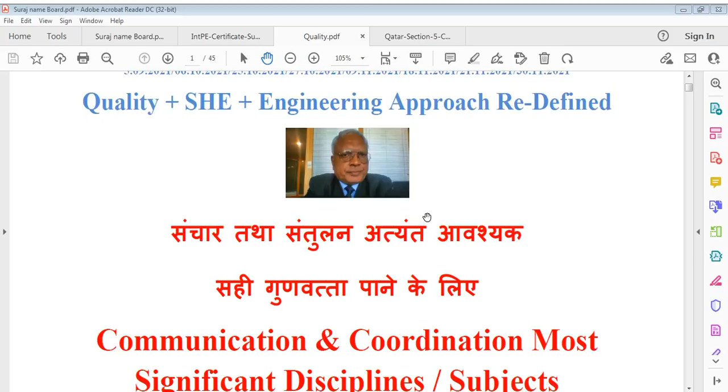Now I was talking about quality, about communication, and about something very important in life. Of course, talking about communication and coordination, I try to explain that. That's very important in our world of engineering, without which we cannot do anything. Without communication and coordination, we stand nowhere, and that's our requirement.

Communication and coordination must stand everywhere in engineering, these are required everywhere, even in design or pre-design, in construction, in sites, or in dealing with contracts. So every detail is required.

That detailing is very much important. If we don't have that detailing capacity, we cannot do engineering. Not only engineering, every work where quantity is required, where quality is required, where coefficients are required, where formulas are required, wherever something is required, communication and coordination are very important.

When you do design work, we have to think of everything. We cannot simply say we have done it. Simply thinking and doing is not enough. We have to think many times. We have to think also what's our objective, what do we want to achieve.

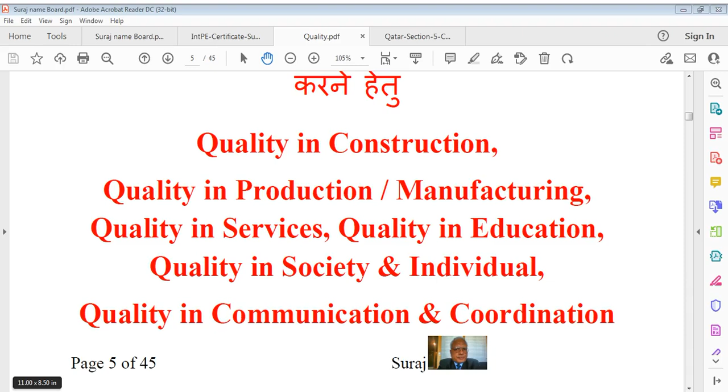A person having the highest level of qualification has capacity to chat properly, because that requires highest functioning of mind, highest functioning of your power. If my mind does not function properly, I cannot chat. So I say quality in construction, quality in production, in manufacturing, in services, in education, in society, in individual, and quality in communication and coordination. We have to get these facts in the real world.

If you don't have these capacities, first of all, quality in society and individual. Many times I have spoken about this, but every time I come back to it, because something else comes into mind. There was a time when people did not understand all this, but people were sincere, professionals were sincere, students were sincere. Everybody had some fixed targets. But now target identity has changed. Only one target among 98% of people remains, and that is how to make money, more and more.

You mean to say that you must have the material world. Even through sciences, through engineering, or through other professions, we are interested in how to make more money. That is our objective, which is really rubbish. It's not scientific, it's not natural, because we have changed our objective, we have changed our track. And when we just live for money, the communication and coordination world disappears. For that purpose we can go to whatever extent, good or bad. So when I'm saying communication and coordination, I have to talk about the professional world, and that is here.

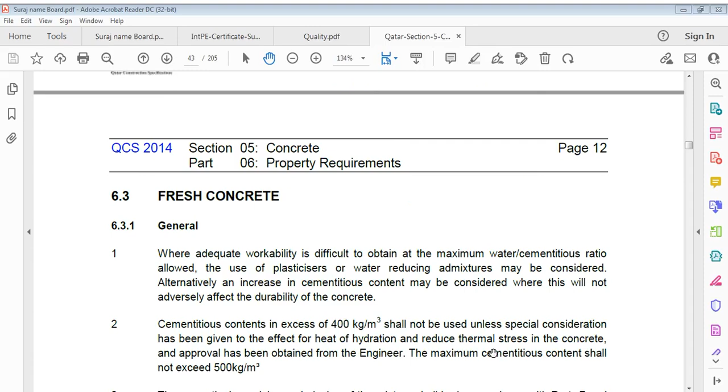Concrete, then we talked of grades of concrete, and durability requirement. So we were here, I have gone through slump etc. You remember? I was talking about temperature of concrete. Let's go back and discuss. It's page 43 of this 205 page file. We talked of temperature. It is 5 and 32 degrees Celsius.

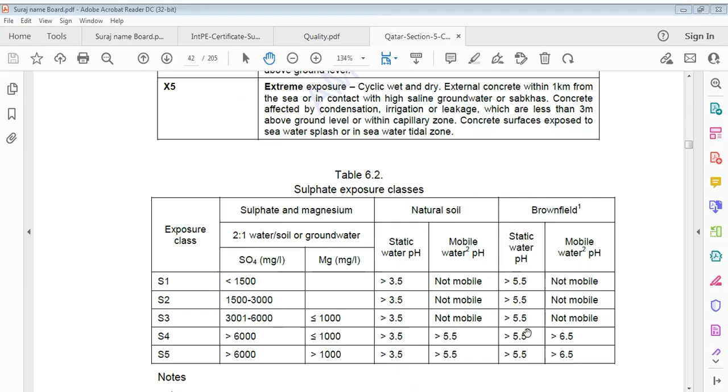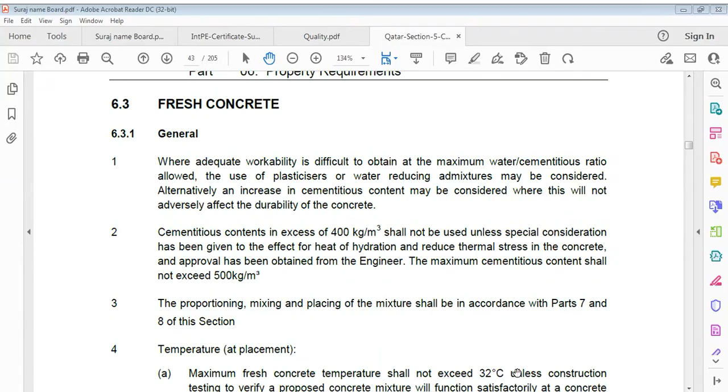We studied that one, and then we went to the various sulfate exposure classes, and exposure classes of reinforcement corrosion, and before that corrosion etc. we talked of. Now we have fresh concrete. What does it say? What is fresh concrete? What does it mean? How does it work? Temperature controls, we have to go through that.

Otherwise we have known everything. So just for a little overlap of previous work: where adequate workability is difficult to obtain at the maximum water/cementitious ratio allowed, use of plasticizers or water reducing admixtures may be considered. Alternatively, an increase in cementitious content may be considered where it shall not adversely affect durability of concrete.

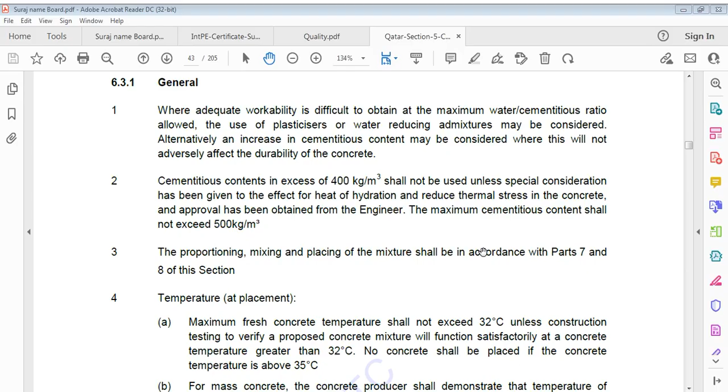Maximum fresh concrete temperature shall not exceed 32 degrees Celsius unless construction testing verifies a proposed concrete mixture shall function satisfactorily at a concrete temperature greater than 32 degrees Celsius. No concrete shall be placed if concrete temperature is above 35 degrees Celsius. So the tolerance limit is from 32 to 35 degrees Celsius. No way should you concrete when its temperature is more than 35, but the normal limit is 32 degrees Celsius. The lower limit is not given here, but that is 4 degrees to 32 degrees.

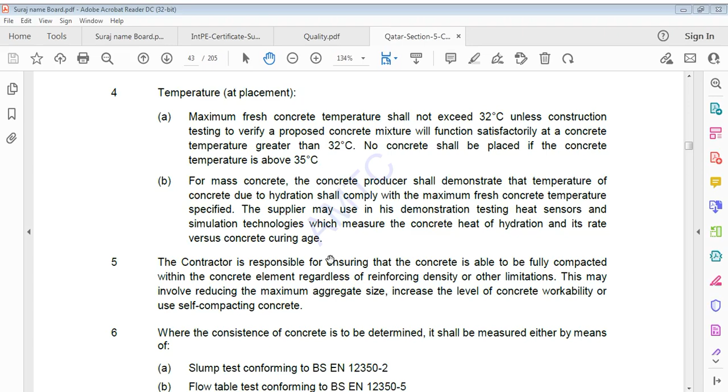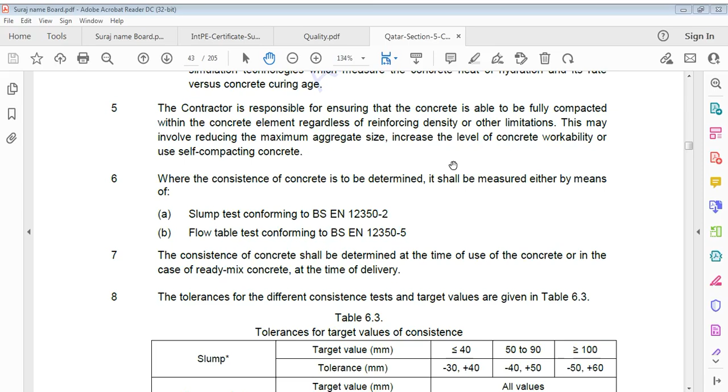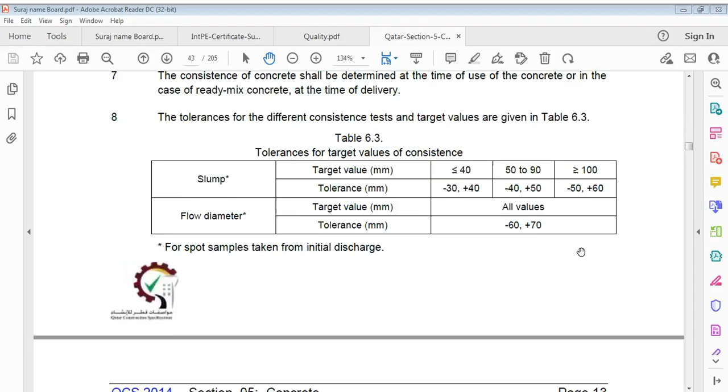Where consistency of concrete is to be determined, it shall be measured either by means of the slump test or flow table test. Consistency shall be determined at time of use of concrete, in case of ready-mix concrete at time of delivery. Tolerances for different consistencies are as follows. Slump is given here, you can see, and of course flow diameter is given. Certain temperature requirements of concrete.

Now we have to find various grades of concrete. You know them, but because we are reviewing this document, we have to refer. Grade means strength of concrete, that is compressive strength of concrete, where strength is classified with respect to compressive strength. This table is used in certain proportions. We have to make it a reference only, currently a temporary reference. Characteristic compressive strength.

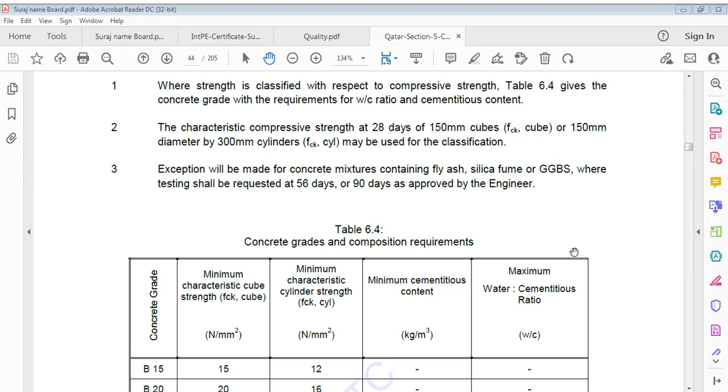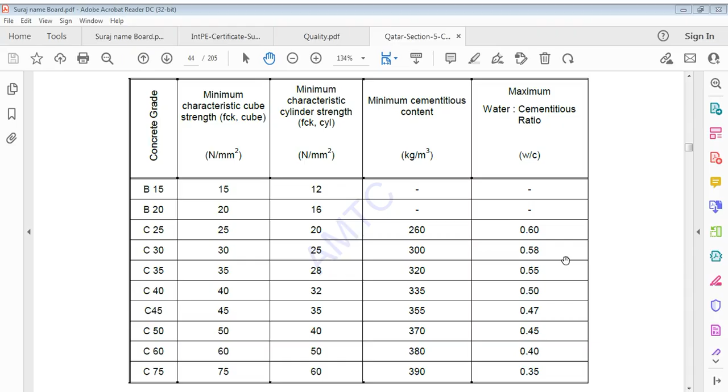Characteristic compressive strength at 28 days of 150 cubes, represented FCK cube, or 150 diameter by 300 cylinders, that is FCK cylinder, may be used for classification. Exception shall be made for concrete mixtures containing fly ash, silica fume, or GGBS, where testing may be requested at 56 days or 90 days as approved. Now, what are these grades? The table columns are concrete grade, B15 to C75, minimum characteristic strength, minimum characteristic cylinder strength, minimum cementitious content, and maximum water cement ratios.

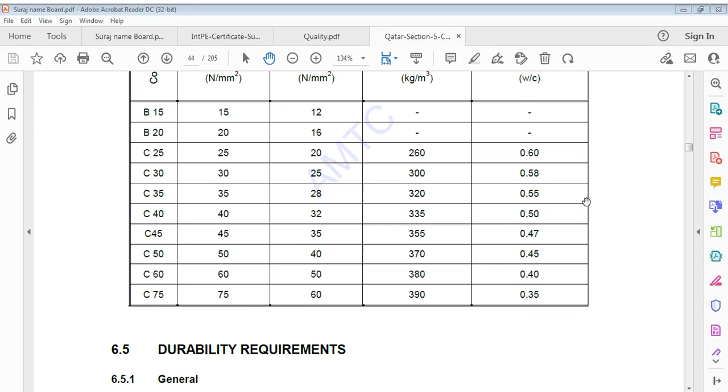These are given here. Cement content never increases beyond 390 here; 400 is the maximum limit. As concrete grade goes higher, from B15 to C75, water cement ratio goes on decreasing, and content of cement increases. For example, in C25 it is 260 kilograms per cubic meter. In C75 it is 390 only, not much different. But water goes on falling, from 0.6 to 0.35, and this is where variation lies. You can review this table yourself, because this is very nominal engineering.

Durability requirement. Durability is very important. It should continue for a long time with the same resistance it starts with. When you produce concrete, whatever resistance you get in 28 days, or 90 days, or 60 days, it should continue with further improvement, but let us say the same, for however many years it has to serve. I say live because this is a living being for me. It is functional, not a dead item. We say its weight is dead, but its function is not dead.

Live actions apply, wind applies, or you can say seismic action applies. Dead load is already there, but it's not the only load; there are so many other loads on that work forever. You can see round the clock, we cannot stop that.

Durability: as we say, constituent materials shall not contain harmful ingredients. First question, and first answer, is what is durability? Its requirement is that constituent materials shall not contain harmful ingredients in such quantities as may be detrimental to concrete durability or cause corrosion of reinforcement.

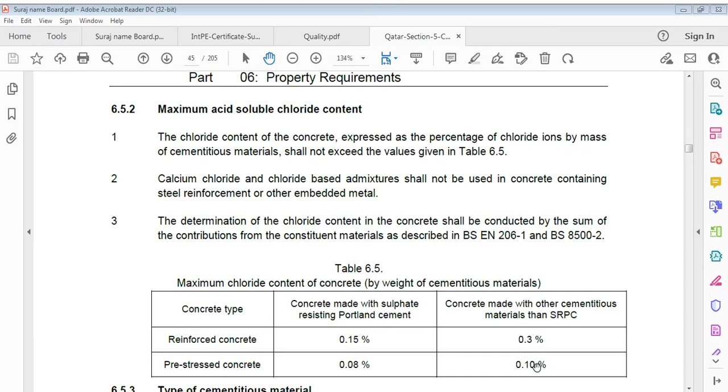And we have seen maximum acid soluble chloride contents, and we have talked about this already. It is calcium chloride, if we can say. Chloride content of concrete, expressed as percentage of chloride ions by mass of cementitious material, shall not exceed the value given in this table.

Calcium chloride and chloride based admixtures, you can say, shall not be used in concrete containing steel reinforcement or other embedded metal.

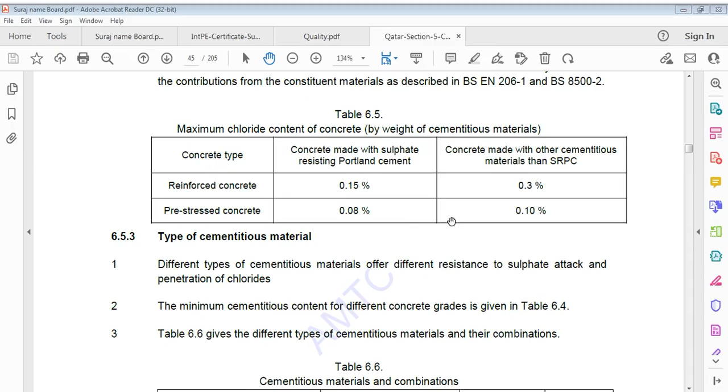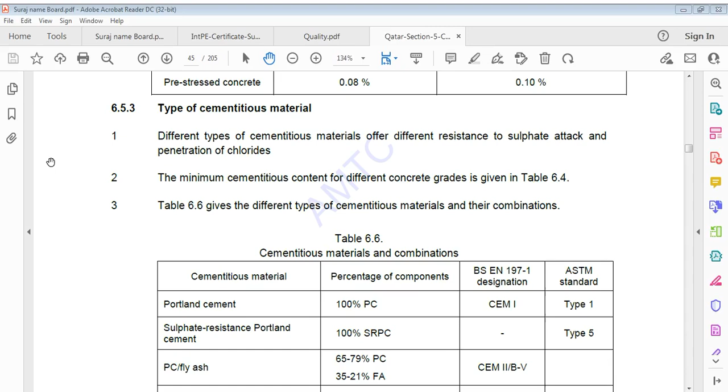Type of cementitious materials: different types of cementitious materials offer different resistances to sulfate attack and penetration of chlorides. Minimum cementitious content for different concrete grades is given in the table. Then we can see this table. Portland cement is already given; we have gone through Portland cement type 1 itself. SRPC is type 5. Here, supplementary cementing material is of no use. Ordinary Portland cement, percentage components 100% PC.

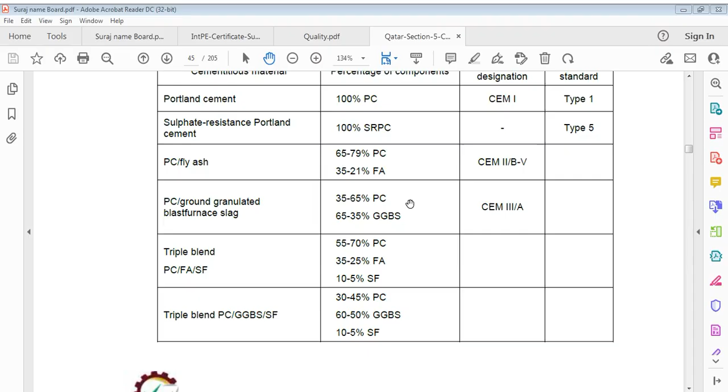Likewise, we have to see about fly ash and PC, combinations of various grades here. We have gone through that before: if it is 65 to 79% Portland cement, then fly ash can be 35 to 21. With PC and GGBS, PC is 35 to 65 and GGBS is 65 to 35. This is the combination, and you also can have a triple blend.

We have PC, fly ash and SF, silica fume or micro silica, and for these three, PC is 55 to 70, fly ash is 35 to 25, silica fume is 10 to 5. This is another triple blend: PC, GGBS, no fly ash in that case. PC is 35 to 45, GGBS 60 to 50, and SF is 5. In fact, generally up to 30% Portland cement and 70% GGBS are used.

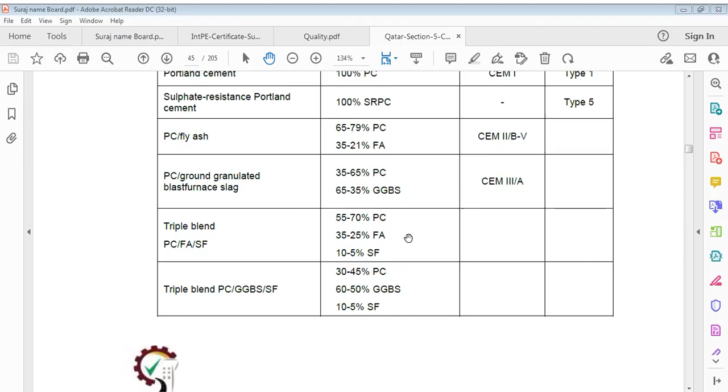Resistance to alkali silica reaction. Alkali silica reaction is the most common form of alkali aggregate reaction. Here's the point: dry concrete is not prone to cracking by alkali silica reaction, as it requires an external source of water to develop sufficiently to cause cracking.

Where aggregate contains a variety of silica susceptible to attack by alkalis from cement and other sources, and concrete is exposed to humid conditions, actions shall be taken to prevent deleterious alkali silica reaction using recommendations and procedures given in BS. These BS are here.

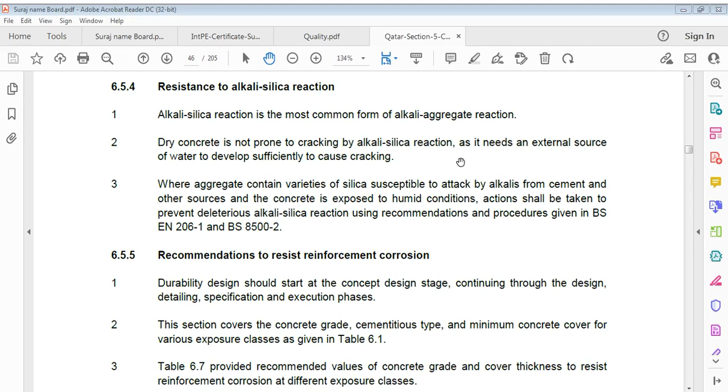Again I say, where aggregate contains a variety of silica susceptible to attack by alkalis from cement and other sources, and concrete is exposed to humid conditions, action shall be taken to prevent deleterious alkali silica reaction. It's called alkali silica reaction because aggregate contains silica that can be attacked by alkalis.

Now we have to resist corrosion and consider durability of concrete. Durability design should start at the concept design stage, continuing through design, detailing, specification and execution phases. This section covers concrete grade, cementitious type and minimum concrete cover for various exposures.

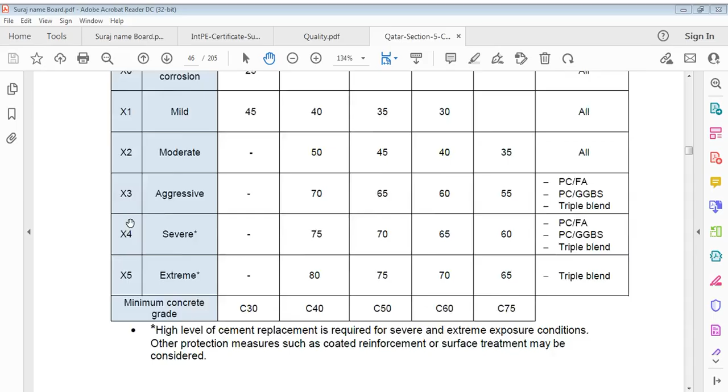Certain covers are given for all exposure classes here, X1, X2, X3. There are 6 exposure classes: no risk of corrosion, mild, moderate, aggressive, severe and extreme. This we have to clearly understand. From mild or moderate to the extreme stage, you see the cover thickness for different concrete grades. Higher grade means lesser cover, lower grade means higher cover.

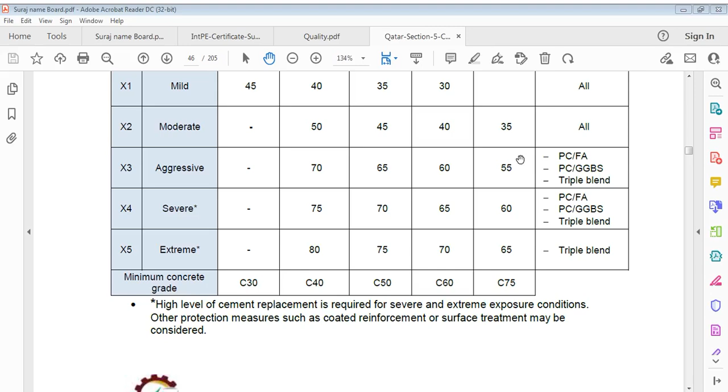And what combination of cement is given here, you can see. We have already discussed this. A high level of cement replacement is required for severe and extreme exposure conditions. Other protection measures such as epoxy coated reinforcement or surface treatment may be considered.

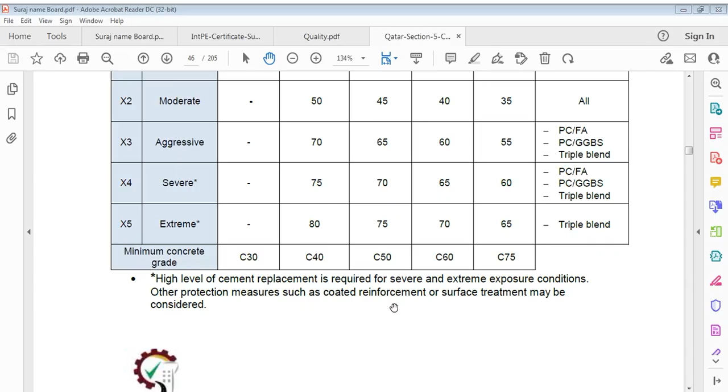So this gives some idea of what thickness of cover can be taken for good durability, and what percentage of OPC can be replaced by GGBS. Sometimes we have used up to 70% replacement of OPC to resist sulfate attack. How to resist sulfate attack?

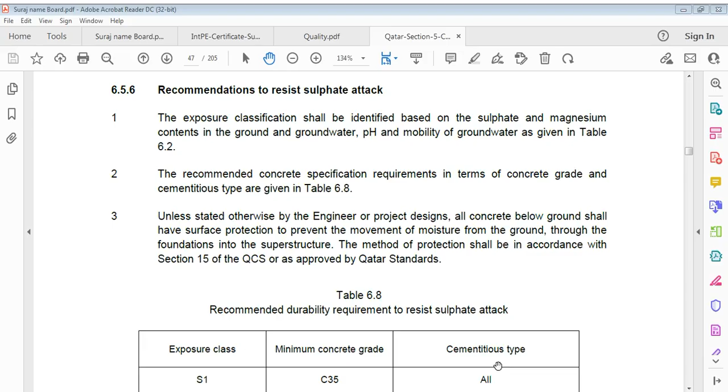Exposure classes shall be identified based on sulfate and magnesium content in the ground and groundwater, that means soil and groundwater, along with the pH and mobility of groundwater. Recommended concrete specification requirements in terms of concrete grade and cement are given.

Unless stated otherwise by the engineer or project designs, all concrete below ground shall have surface protection to prevent movement of moisture from the ground through foundations into the superstructure. The method of protection shall be in accordance with other standards. Now, what is the recommended durability requirement to resist sulfate attack?

There are 5 sulfate classes, S1 to S5. S5 requires special treatment when sulfate content exceeds 6000 mg per liter and magnesium content exceeds 1000 mg per liter.

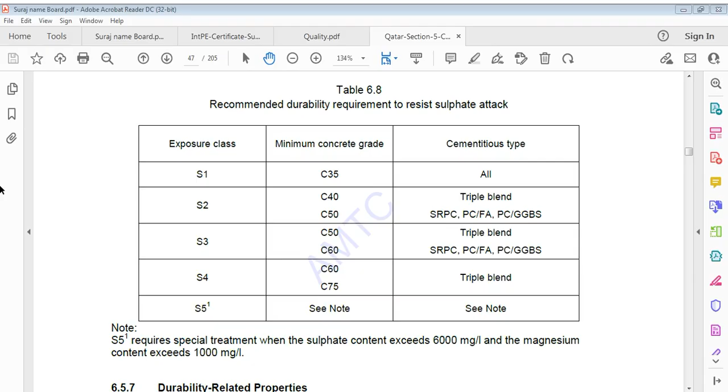Durability related properties. Durability of concrete is greatly influenced by the ability of the concrete cover to resist movement of liquids and gases through concrete. Commonly used tests for assessing transport properties of concrete are given in this table. No values are currently specified for various exposure classes, but they may be requested by engineers.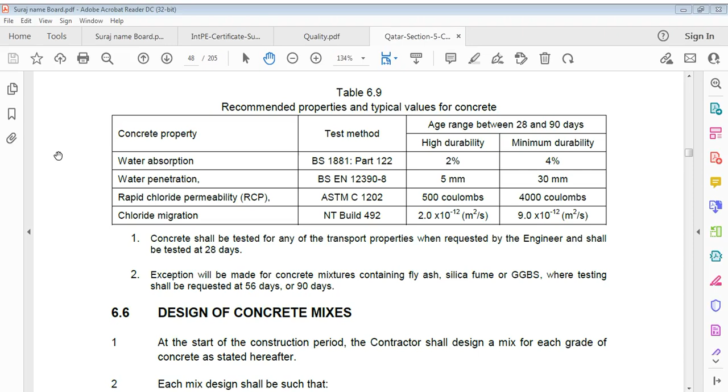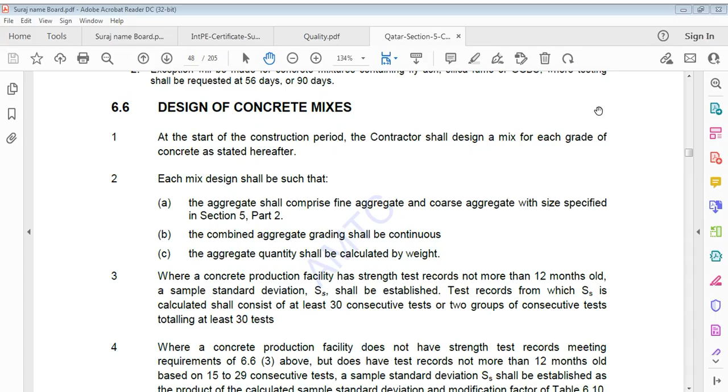Design of concrete mixes. Whenever you start some construction, the contractor should design a mix for each grade of concrete. Each mix design shall be such that the aggregate shall comprise fine and coarse aggregate with the size specified. Combined aggregate grading shall be continuous. Aggregate quantity shall be calculated by weight, not by volume.

So there are three conditions. Aggregate comprises fine and coarse aggregates. Combined aggregate grading shall be continuous. Aggregate quantity shall be calculated by weight.

Where a concrete production facility has strength test records not more than 12 months old, a sample standard deviation can be worked out. The test records from which it is calculated consist of 30 consecutive tests or groups of consecutive tests totaling at least 30.

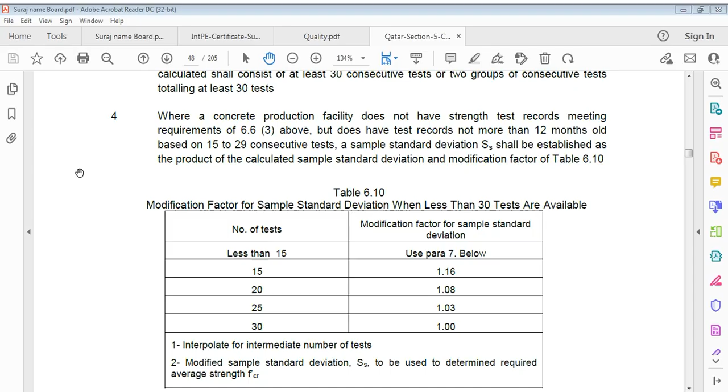Where a concrete production facility does not have enough strength tests, we can use some factors given in this table. If there are less than 15 tests, then use para 7 below; we'll see what that is. Then for 15, 20, 25, 30 tests we can use these coefficients, the modification factor for sample standard deviation. Interpolate for intermediate numbers of tests; the modified sample standard deviation is used to determine the required average strength.

To determine the correction factor between cube strength and cylinder strength, the contractor establishes at least 30 consecutive strength tests from each proposed mix. This correction remains valid through the project, provided no change in material properties and no change in source occurs. The required average compressive strength, the target mean strength used as the basis for selection of concrete proportions, shall be determined here.

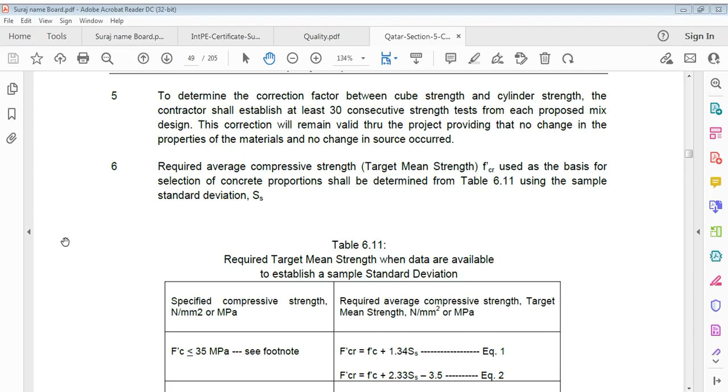Now, required target mean strength when data are available to establish a sample standard deviation. Column 1 is specified compressive strength in Newton per millimeter square or MPa, and column 2 is required average compressive strength, target mean strength, in MPa. When the specified fc is less than or equal to 35 MPa, use the larger value computed from the equations.

fcr, the required average compressive strength or target mean strength, is fc plus 1.34 Ss, 1.34 standard deviation. That's equation 1. The other one is fc plus 2.33 Ss minus 3.5. That is equation 2 in this case.

When fc is greater than 35 MPa, fcr is equal to fc plus 1.34 Ss as before, and the other is fcr equals 0.9 fc plus 2.33 Ss. We apply a 10% reduction factor here.

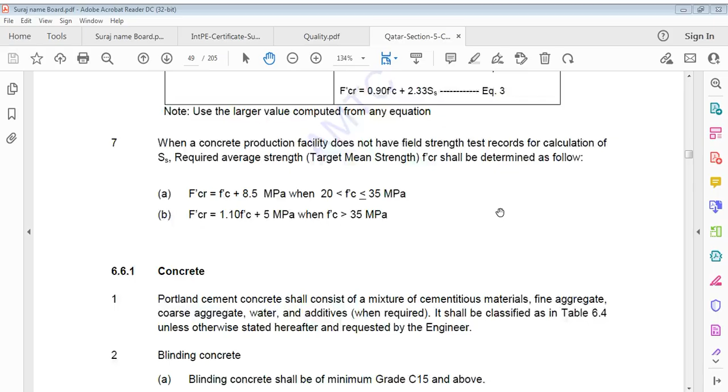When a concrete production facility does not have field strength test records for calculation of Ss, the required average strength, target mean strength fcr, shall be determined as follows: fcr equals fc plus 8.5 MPa when fc is in the range of 20 to 35 MPa, and 1.1 fc plus 5 MPa when fc is greater than 35 MPa. So this is the formula; we have to understand this point. This is the required target mean strength table when data are available.

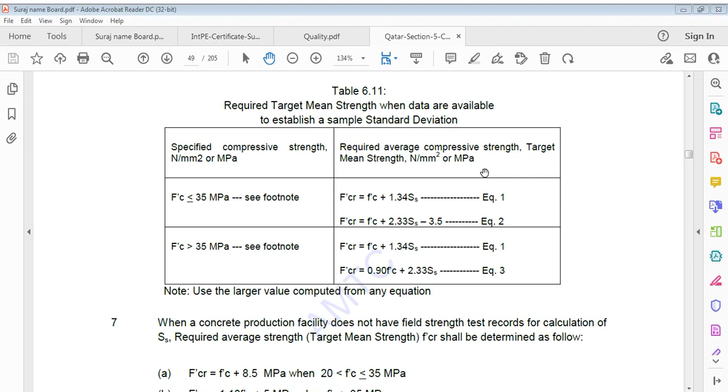Portland cement concrete shall consist of a mixture of cementitious materials, fine aggregate, coarse aggregate, water and additives when required. It shall be classified as follows unless otherwise stated hereinafter. Blinding concrete.

Blinding concrete shall be minimum grade 15 and above, not below 15. I know you know what blinding concrete is. In India we call this lean concrete; it is non-structural concrete on which our foundations rest. Thickness of blinding concrete shall be as shown on drawings, but in no instance less than 75, so minimum is 75 mm.

Surface finish to blinding concrete is class U4 as specified in part 9 of this section. We'll see that. It's not very much finished, but an ordinary finish.

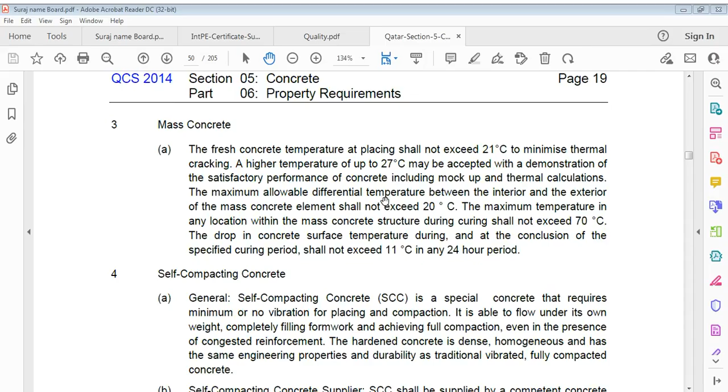Now, what is the other one? Mass concrete. It's massive concrete, in fact. Fresh concrete temperature at placing shall not exceed 21 degrees Celsius. So this is given here.

Massive concrete temperature. Massive concrete is a big item, a big foundation, where minimum size is more than 0.8 meter, and quantity of concrete is much more than 8 cubic meter. Fresh concrete temperature in this case should be 21 degrees Celsius. It should not exceed that.

To minimize thermal cracking has to be minimized. Higher temperature up to 27 degrees may be accepted with demonstration of satisfactory performance of concrete, including mock-up and thermal calculations.

Maximum allowable differential temperature between interior and exterior of mass concrete element shall not exceed 20 degrees. It's a point of concern. This point should be noted properly, and this is a very much professional point. Internal and external mass concrete difference of temperature shall not exceed 20 degrees Celsius.

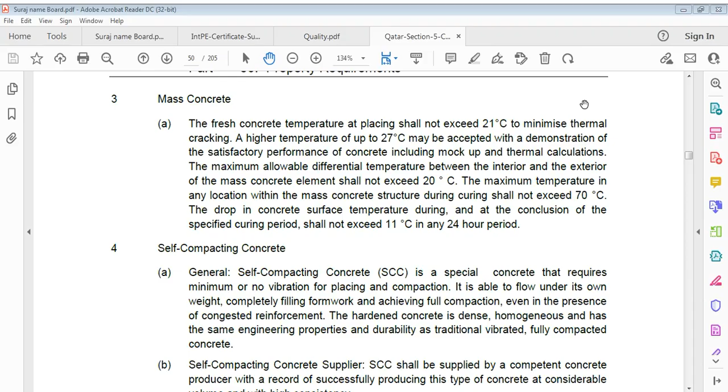Maximum temperature at whatever location is 70 degrees at conclusion. Also concrete temperature drop on surface of concrete, when curing is almost over, should not exceed 11 degrees Celsius drop in concrete surface temperature in 24 hours. We have to understand this clearly in concrete, otherwise it shall be a problem.

Now, self-compacting concrete. General self-compacting concrete is a special concrete that requires minimum, or no vibration, for placing and compaction. It's able to flow under its own weight, completely filling formwork and achieving full compaction, even in presence of congested reinforcement. Hardened concrete is dense, homogeneous, and has the same engineering properties and durability as traditional vibrated fully compacted concrete.

Good paragraph. Self-compacting concrete, SCC, is a special concrete that requires minimum or no vibration for placing and compaction. It's able to flow under its own weight, completely filling formwork and achieving full compaction even in presence of congested reinforcement. Hardened concrete is dense, homogeneous, and has the same engineering properties and durability as traditional vibrated fully compacted concrete.

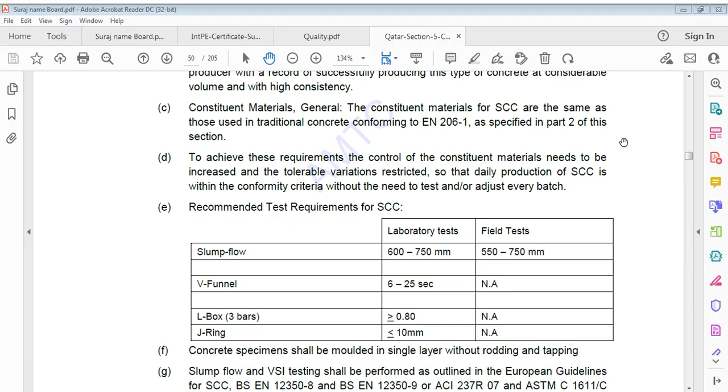Self-compacting concrete shall be supplied by a competent concrete producer with a record of successfully producing this type of concrete at considerable volume. Constituent materials for self-compacting concrete are the same as those used in traditional concrete. To achieve these requirements, control of constituent materials needs to be increased and tolerable variations restricted so that production of SCC is within conformity criteria without requirement to test or adjust every batch.

Recommended test requirements for SCC: one is slump flow, other is V funnel, L box, and J-ring. Slump flow is both laboratory and field. We have in laboratory 600 to 750 mm slump flow.

Concrete specimen shall be molded. In this case, slump flow is 600 to 750, which tells how flowable it is. Concrete specimen shall be molded in a single layer without rodding and tapping.

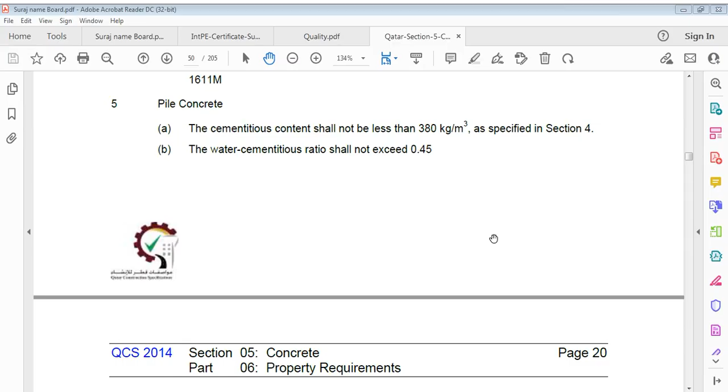Pile concrete: cementitious content shall not be less than 380 kg per cubic meter, 380 kg minimum. Water cementitious ratio shall not exceed 0.45. So here's a very important point: minimum cement content is 380 kg per cubic meter and water cementitious ratio not to exceed 0.45.

Concrete mixture shall be designed of high slump, not less than 150 mm, allowing proper free fall with excellent homogeneity.

When concrete mixture requires slump of greater than 230 mm, it shall be designed as self-compacting concrete.

Concrete slump shall have adequate workability retention using approved type of retarder and shall be submitted in design mix. Increase in workability shall not permit any decrease in specified design strength. Design strength should remain the same.

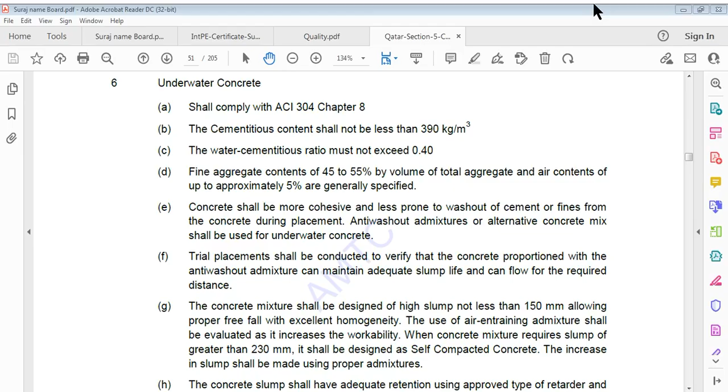Generally specified air content is up to 5%, and fine aggregate content is 45 to 55%. Concrete shall be more cohesive and less prone to washout of cement or fines from concrete. This means slurry should not go out during placing.

Anti-washout admixture or alternative concrete mix shall be used for underwater concrete. I repeat, concrete shall be more cohesive and less prone to washout of cement or fines from concrete during placement. Anti-washout admixture, or alternatively,

trial placements shall be conducted to verify that concrete proportioned with anti-washout admixture can maintain adequate slump life and can flow for the required distance. Concrete mixture shall be designed of high slump, not less than 150 mm, allowing proper free fall with excellent homogeneity.

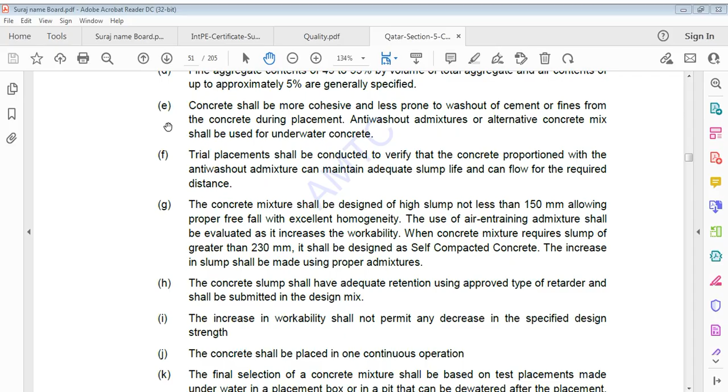Use of air entraining admixture shall be evaluated as it increases workability. When concrete mixture requires slump of greater than 230 mm, it shall be designed as self-compacted concrete. Increase in slump shall be made using proper admixtures.

Concrete slump shall have adequate retention using approved type of retarder and shall be submitted in design mix. Increase in workability shall not permit any decrease in specified design strength. Concrete shall be placed in one continuous operation.

Final selection of a concrete mixture: concrete shall be placed in one continuous operation. Final selection of concrete mixture shall be based on test placement made underwater in a placement box, in a pit that can be dewatered after placement.

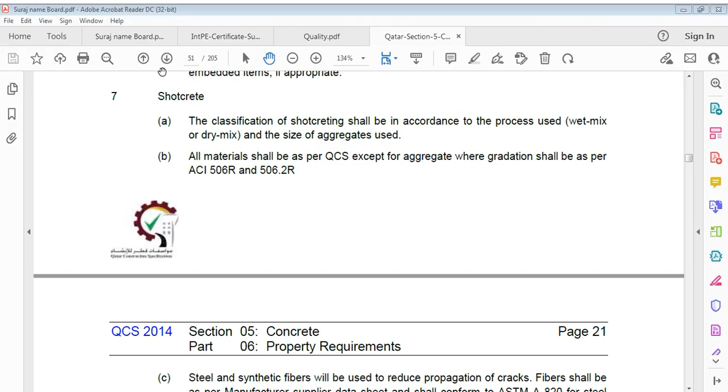Steel and synthetic fibers shall be used to reduce propagation of cracks. Fibers shall be according to manufacturer supplier data sheet and conform to ASTM A820 for steel fiber and ASTM C1116 for synthetic fiber.

Now you can say nozzle operator. Nozzle operator should be certified. First of all, we have to see nozzle because it's shotcrete. Nozzle operator should be certified and have completed at least one similar application as nozzle operator on a similar project. Nozzle operator should also be able to demonstrate, by test, ability to satisfactorily perform required duties and apply shotcrete as required by specification.

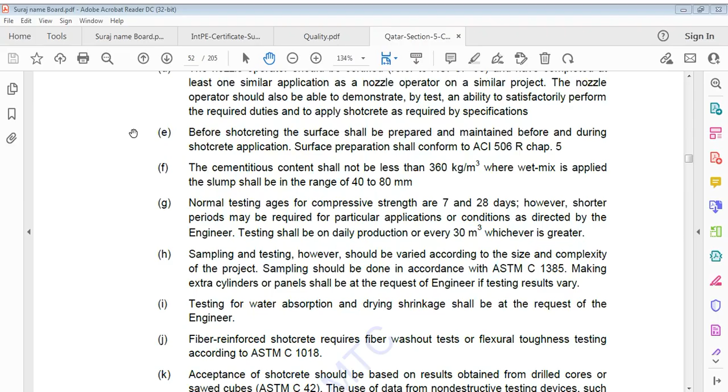Before shotcrete application, and maintained before and during concrete shotcrete application, surface preparation shall conform to this code ACI 506R chapter 5. Cementitious content shall not be less than 360 kg per cubic meter in case of shotcrete.

When wet mix is applied, slump shall be in range of 40 to 80 mm. Normal testing ages for compressive strength are 7 and 28 days. However, shorter periods may be required.

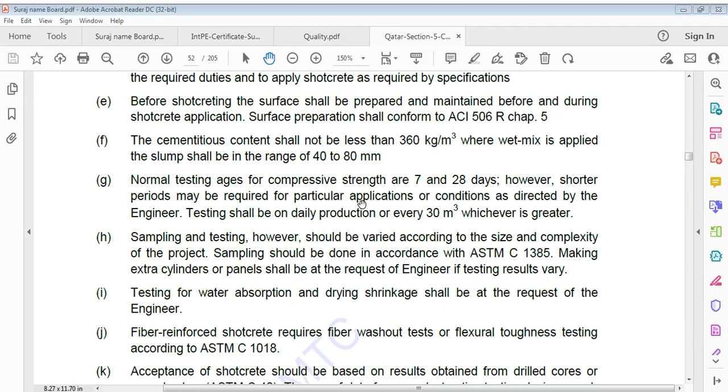Normal testing ages for compressive strength are 7 and 28 days. However, shorter periods may be required for particular applications or conditions as directed by engineer. Testing shall be on daily production or every 30 cubic meters, whichever is greater. Sampling and testing, however, should be varied according to size and complexity of project. Sampling should be done in accordance with ASTM C1385.

Making extra cylinders or panels shall be at request of engineer if testing results vary. Testing for water absorption and drying shrinkage shall be at request of engineer. Fiber reinforced shotcrete requires fiber washout tests or flexural toughness tests.

Acceptance of shotcrete should be based on results obtained from drilled cores or sawed cubes. Use of data from non-destructive testing devices such as impact hammer or probes, ultrasonic equipment, and pull-out devices may be useful in determining uniformity and quality of in-place shotcrete. These tests, however, may not provide reliable values for compressive strength.

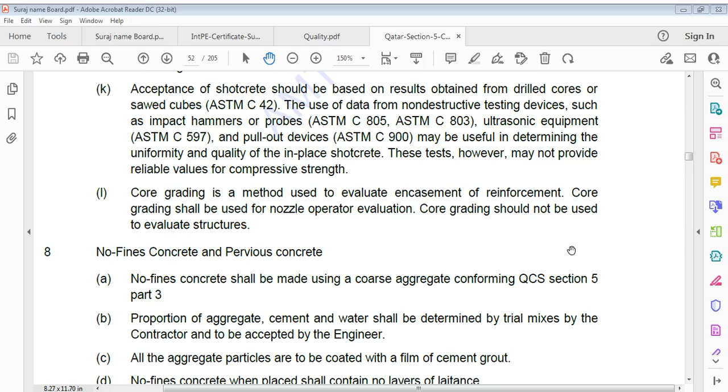No fines concrete and pervious concrete. No fines concrete shall be made using a coarse aggregate conforming to QCS section 5. Proportion of aggregate, cement and water shall be determined by trial mixes by contractor and to be accepted by engineers.

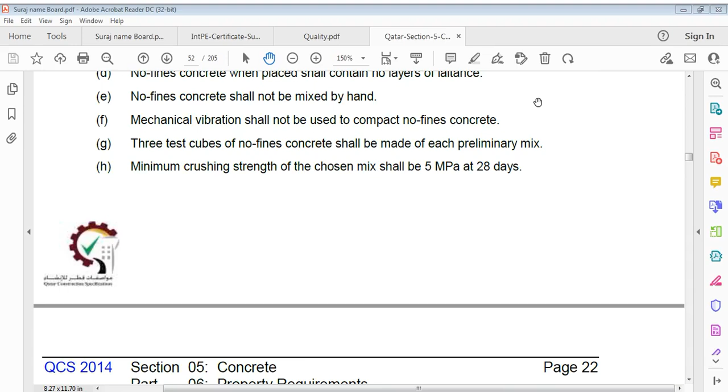Porosity of no fines concrete shall be such that water passes through a slab 300 mm thick at a rate of not less than 7 liters per square meter per second of slab, with a constant 100 mm depth of water on the slab. On a slab 300 mm thick, put 100 mm of water, and then you see how it works in filtration or percolation, how automatically it works.

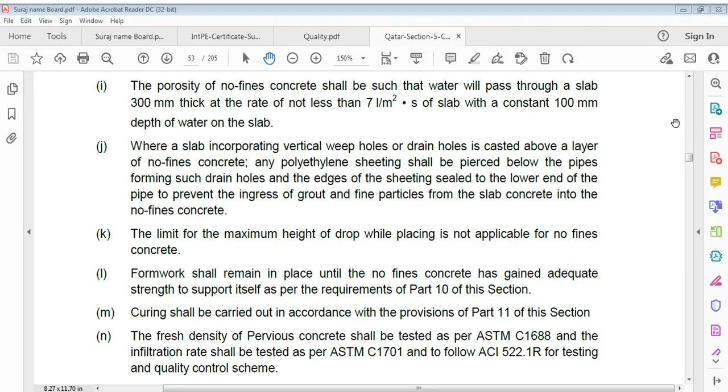Limit for maximum height of drop while placing is not applicable for no fines concrete. There is no limit of maximum height of drop while placing. Formwork shall remain in place until no fines concrete has gained adequate strength to support itself. Curing shall be carried out in accordance with provisions of Part 11.

You can say the limit of maximum height of drop while placing is not applicable for no-fines concrete. Formwork shall remain in place until no-fines concrete has gained adequate strength to support itself. Curing shall be carried out in accordance with provisions of Part 11 as well. Fresh density of pervious concrete shall be tested, and infiltration from

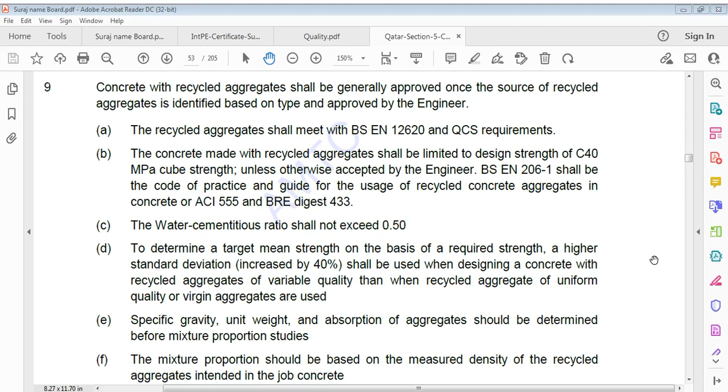Concrete made with recycled aggregates shall be limited to a design strength of C40 MPa cube strength unless otherwise accepted by the engineer. Water cement ratio shall not exceed 0.5.

To determine a target mean strength on basis of a required strength, a higher standard deviation increased by 40% shall be used when designing a concrete with recycled aggregate of variable quality than when recycled aggregate of uniform quality or virgin aggregates are used.

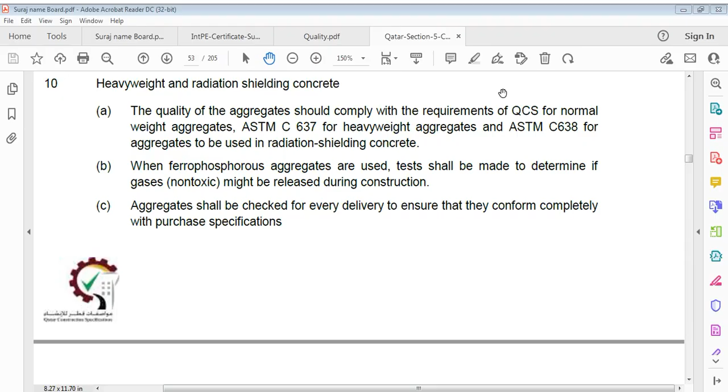When ferrophosphorous aggregates are used, tests shall be made to determine if gases that are nontoxic might be released during construction. Aggregate shall be checked for every delivery to ensure no deleterious substances.

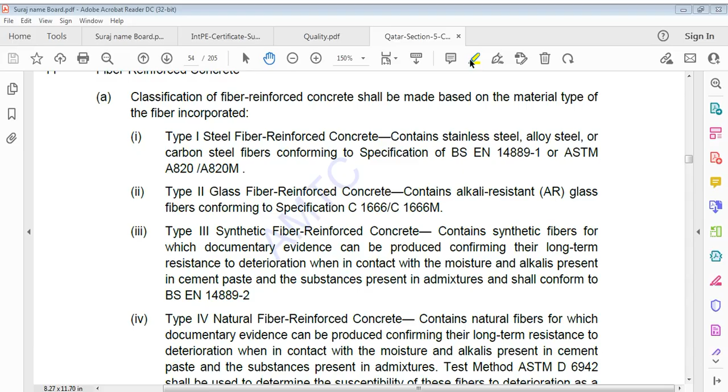Type 2, glass fiber reinforced concrete. Glass fiber reinforced concrete contains alkali resistant glass fibers conforming to specification C1666/C1666M. Type 2, there is glass fiber, that is, glass fiber reinforced concrete contains alkali resistant glass fibers conforming to specification.

Now, type 3 synthetic fiber reinforced concrete contains synthetic fibers for which documentary evidence can be produced, confirming their long-term resistance to deterioration when in contact with moisture and alkalis present in cement paste and substances present in admixtures.

Type 3 synthetic fiber reinforced concrete contains synthetic fibers for which documentary evidence can be produced, confirming their long-term resistance to deterioration when in contact with moisture and alkalis present in cement paste and substances present in admixtures, and conform to BS EN 14889-2.

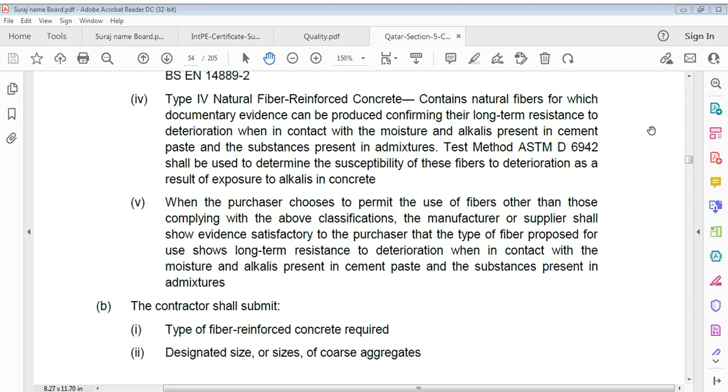When purchaser chooses to permit use of fibers other than those complying with above classifications, manufacturer or supplier shall show evidence satisfactory to purchaser that type of fiber proposed for use shows long-term resistance to deterioration when in contact with moisture and alkalis. Yes.

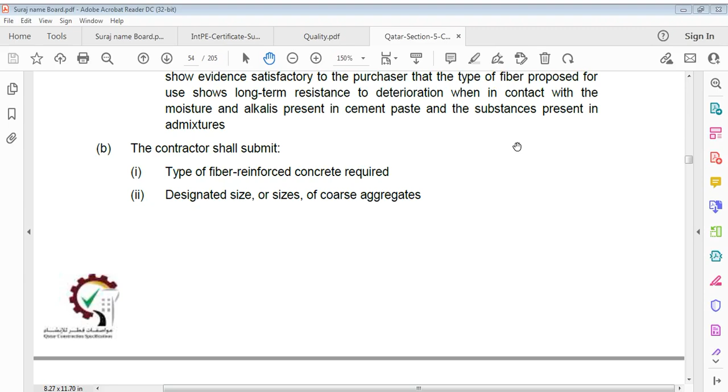slump or time of flow required at point of delivery or appropriate point of placement, subject to tolerances. Specified slump shall be specified when it is anticipated to be 50 mm or more, except as otherwise specifically permitted by engineer. Cement, supplementary cementitious material, fine and coarse aggregates, mixing water and admixtures shall be measured in accordance with applicable requirements of QCS. Fiber shall be measured by mass.

When fibers are to be measured by mass, bags, boxes, or like containers are acceptable, provided that such containers are sealed by the fiber manufacturer.

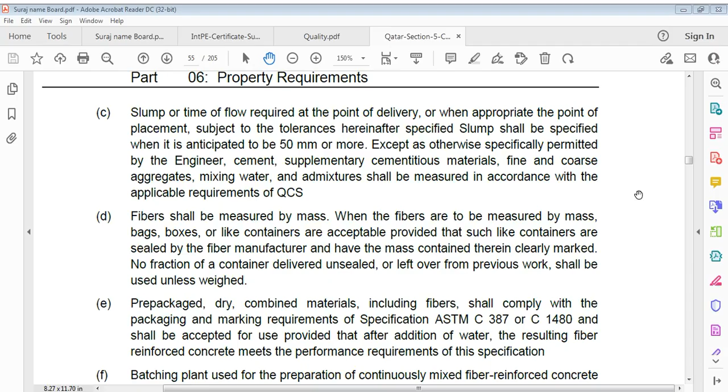So we can go on, read this for a couple of minutes. Meanwhile, I'll be back in a moment. If it continues, we'll talk. Okay. What is that? This is important, and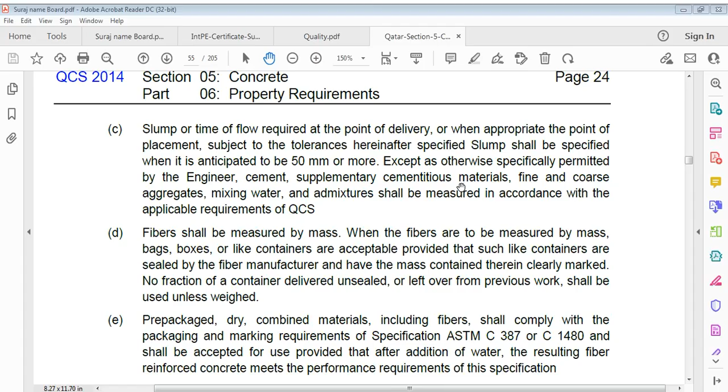More, except as otherwise specifically permitted by engineers. Cement... delivery or appropriate point of placement, subject to tolerances. Specified slump shall be specified when it is anticipated to be 50 mm or more, except as otherwise specifically permitted by engineers. Cement, supplementary cementitious materials, fine and coarse aggregates, mixing water and admixtures.

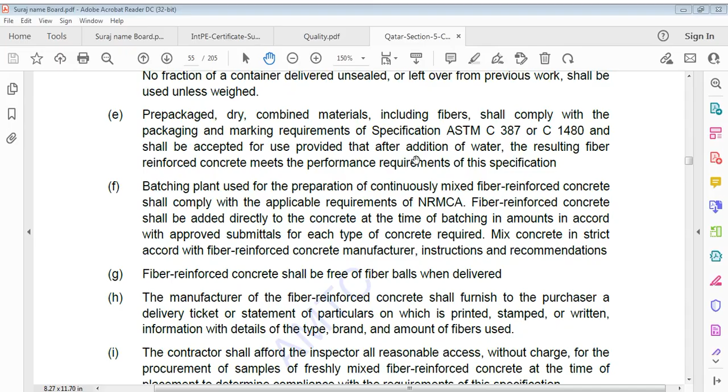Including fibers shall comply with packing, packaging and marking requirements of specifications and be accepted for use provided that... Manufacturer of fiber reinforced concrete shall furnish to purchaser a delivery ticket or statement of particulars on which is printed, stamped, or written information details of type, brand, and amount of fibers used.

Contractor shall afford inspector all reasonable access without charge for procurement of samples of freshly mixed fiber reinforced concrete at time of placement to determine compliance with requirements of this specification. Samples of batch mixed fiber reinforced concrete shall be obtained in accordance with practice for shotcrete as appropriate, except that wet sieving shall not be permitted.